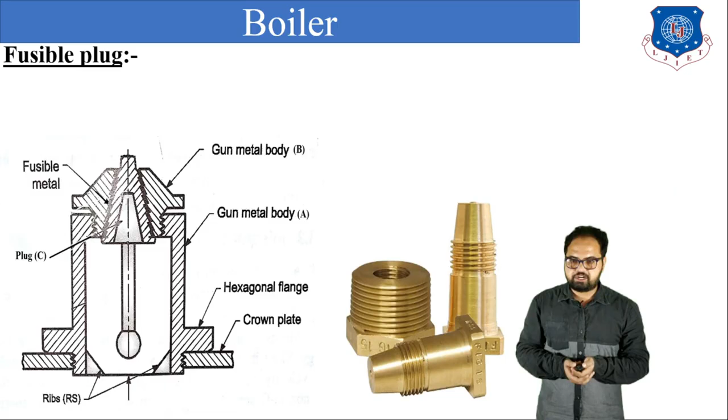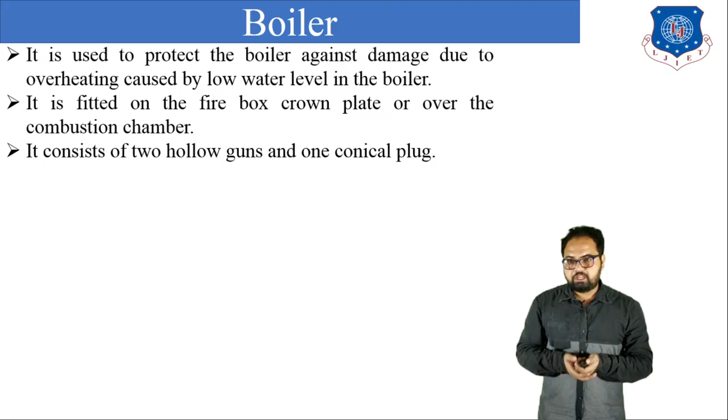So let's discuss the fusible plug in detail. The function of the fusible plug is to protect the boiler against damage due to overheating caused by low water level inside the boiler. It is fitted over the firebox crown plate or over the combustion chamber. It consists of two hollow gunmetals and one conical plug.

In normal working condition, the upper surface of the fusible plug is covered with water and the other end of the plug is exposed to the fire or hot gases. But when the water level inside the boiler falls below the danger level, the fusible plug is uncovered by the water and gets exposed to the steam.

This overheats the plug, and the fusible metal having a low melting point melts quickly, and thus the plug drops down. The hollow gunmetal B becomes open and the steam rushes into the furnace and puts out the fire. So this is all about the fusible plug.

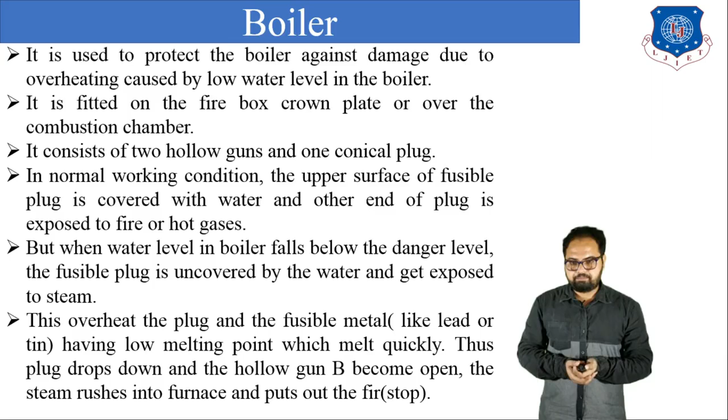Next is the blow off cock. From the name we can easily understand the function of the blow off cock. The blow off cock is mainly used for two purposes. First is to remove all the impurities inside the boiler drum, and the second is to empty the boiler whenever necessary maintenance work is required.

The blow off cock is generally fitted at the end of the mud box with the help of flanges and nut bolts. So whenever we require to empty the boiler or remove the impurities from the boiler, you can see in this image there is a plug valve or hole provided. Whenever that hole comes in the direction of the flow, the impurities will come out of the boiler, and whenever that hole is in the opposite direction of the flow, the flow will be stopped.

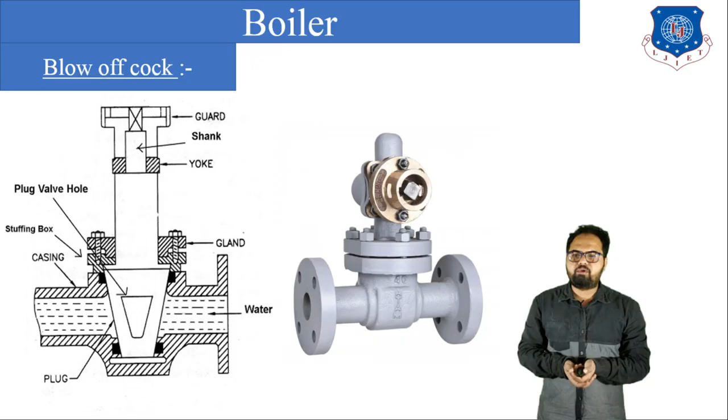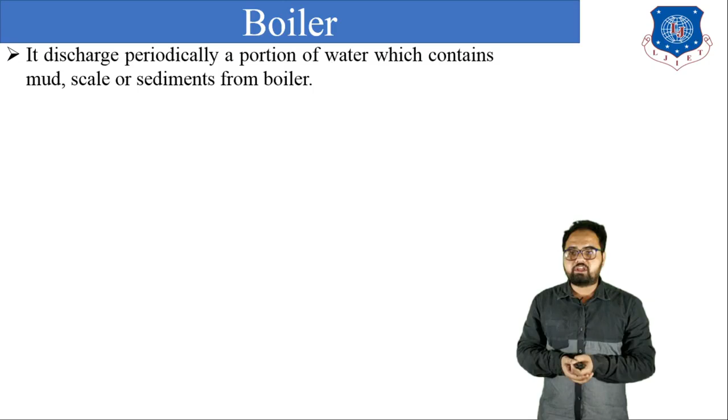So this is the basics of the blow off cock. The function of the blow off cock is similar to the tap which we use at home. So let's discuss the blow off cock. First of all, it periodically discharges a portion of the water which contains mud, scale or sediment from the boiler.

It is also used to empty the boiler, that we have already discussed. It is fitted on the boiler shell directly to the lowest part of the water space, because the impurities' density is higher than the water, so all impurities are collected at the bottom of the boiler. So this blow off cock is fitted at the boiler shell directly at the lowest part of the water space.

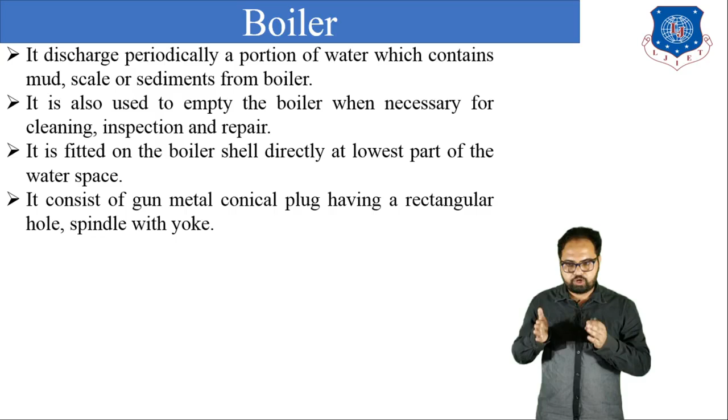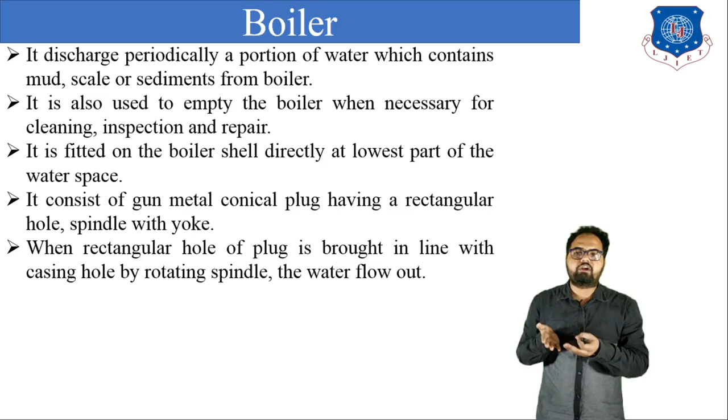It consists of a gunmetal conical plug, which has a rectangular hole, with spindle and yoke mechanism. When the rectangular hole of the plug is brought in line with the casing hole by rotating the spindle, the water will flow out. When the solid portion of the plug is in front of the casing hole, the water cannot come out of the boiler. So this is all about the blow off cock.

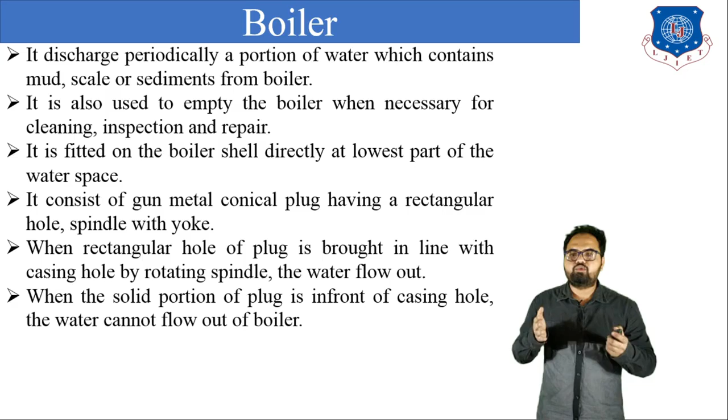One more thing, the top portion of the blow off cock is always square in shape, so that we can operate it with the help of a spanner, because in the boiler the blow off cock is always in contact with the hot water. By accepting the heat the conical plug becomes hot, so we cannot operate it manually by hand, so we use a spanner for operating the blow off cock.

Next is the feed check valve. The function of the feed check valve is to feed the water to the boiler. In normal working condition, the feed check valve will be closed. Whenever we want to transfer the liquid to the boiler, we operate the hand wheel provided at the top of the feed check valve. When we operate that hand wheel, we can see that inside there is a valve and valve seat, so the valve is lifted up from the valve seat with the help of the spindle, and at that time the flow of water takes place inside the boiler.

You can see the hand wheel, and a gland packing is provided, which is used to prevent the leakage of water. A spindle is provided, and a non-return valve is also there. Now the question is, why is a non-return valve provided there? So dear students, whenever the water is entering the boiler, the feed check valve is always subjected to two pressures. The first is the pressure of the pump, which is the inlet water pressure, and the second is the operating pressure of the boiler, because this side is always connected with the boiler and this side is always connected with the pump.

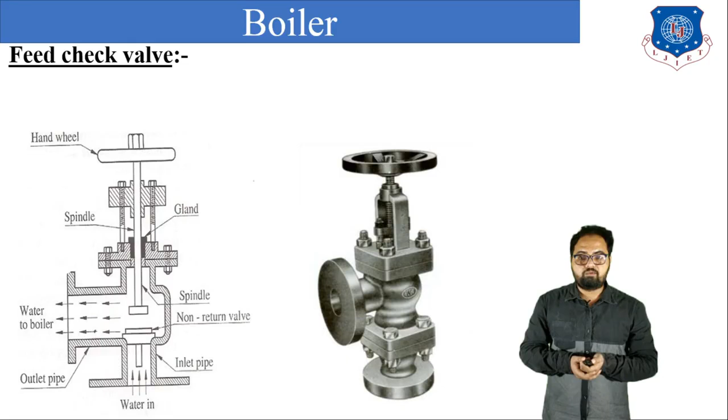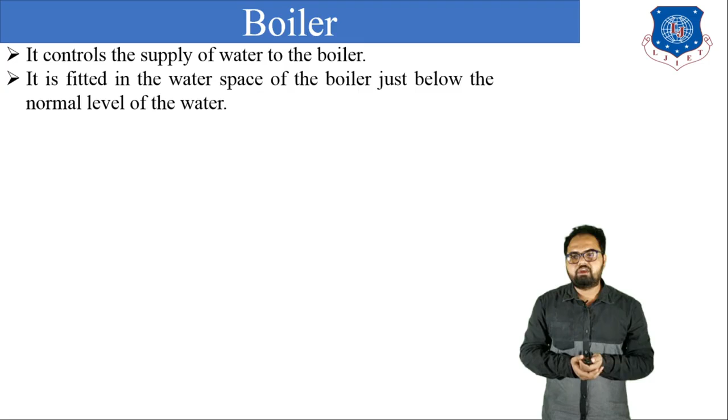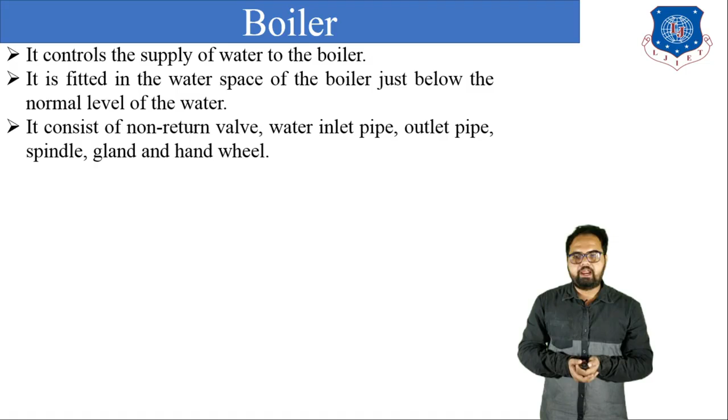So let's discuss the feed check valve in detail. First of all, it controls the supply of water to the boiler, that we have already discussed. Next, it is fitted in the water space of the boiler, just below the normal level of the water. It consists of a non-return valve, water inlet pipe, outlet pipe, spindle, gland and hand wheel. The inlet pipe and outlet pipe expose the valve to different pressures, that we have already discussed. The pressure difference lifts the non-return valve and allows the water to enter the boiler.

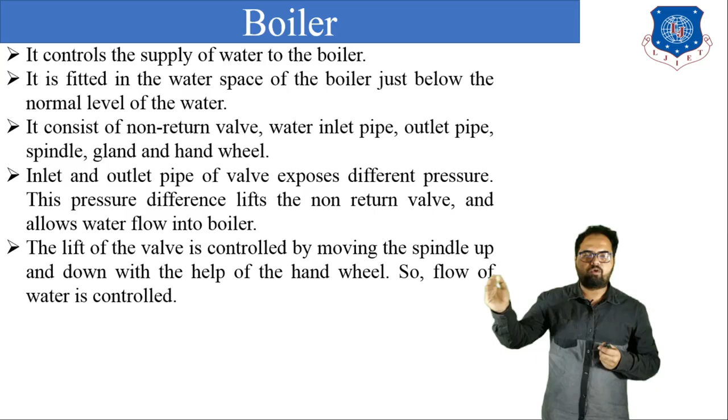The lift of the valve is controlled by the movement of the spindle up and down, so if the spindle is up the water flows in, and if the spindle is down the flow of water is closed. So this is all about the feed check valve.

Next is safety valves. According to IBR, the Indian Boiler Regulation, a minimum of two safety valves are installed on a boiler.

In normal working condition, when the pressure inside the drum is below the safe working pressure, the valve which is already fitted rests on the valve seat, or we can say the pivot rests over the valve seat.

But if the pressure inside the steam increases beyond the safe working limit, against the spring force, the pivot lifts up from the valve seat, and the excess steam is released to the atmosphere, maintaining safe working pressure inside the boiler. The spring force is set according to the safe working pressure of the boiler.

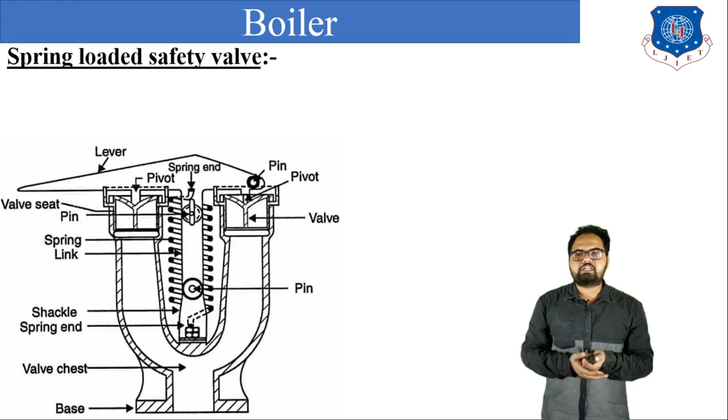So let's discuss the spring loaded safety valve in detail. First of all, it consists of a cast iron body having two branch pipes. A lever is placed over that body by means of pivots.

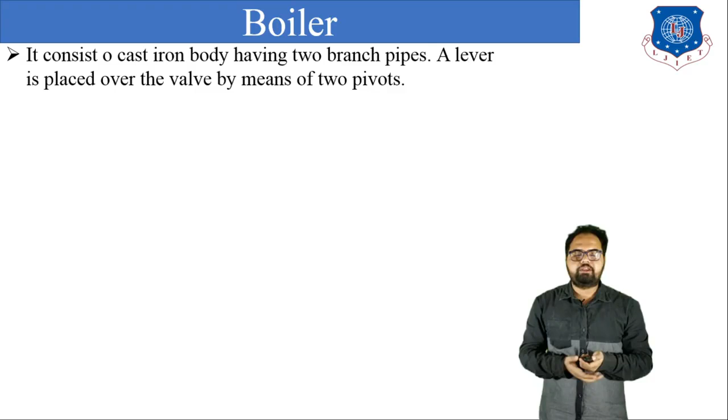In normal working condition, the downward force due to the spring is higher than the upward force applied by the steam, and the valve is closed with the help of the spring force.

When the steam pressure exceeds the normal limit, the upward force due to the steam pressure becomes higher than the downward force of the spring, and thus the valve is lifted from its seat, opening a passage for the steam to release out of the boiler. So this is all about the spring loaded safety valve.

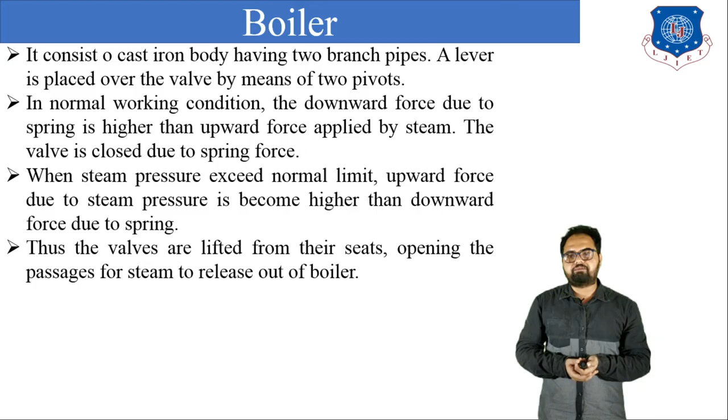Next is the steam stop valve. From the name we can easily understand the function of the steam stop valve. It is used to stop the flow of steam.

Whenever we want to transfer steam from one pipe to another, or from the boiler to the turbine, the hand wheel is rotated. Due to the rotation of the hand wheel, the valve lifts up from the valve seat and steam transfers from one pipe to another. This is the basic operation of the steam stop valve.

The function of the steam stop valve is similar to the feed check valve, except in the feed check valve we transfer water, while in the steam stop valve we transfer steam. The second difference is that the steam stop valve has no non-return valve installed, while the feed check valve has a non-return valve fitted.

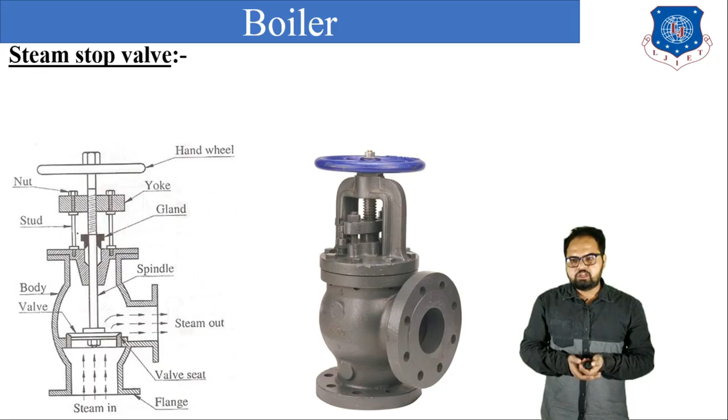So let's discuss the steam stop valve in detail. First of all, it regulates the flow of steam from the boiler to the steam pipe. It is fitted to the boiler at the highest part of the steam space.

The spindle is rotated with the help of the hand wheel, and due to rotation of the spindle, the valve moves up and down. When the valve sits over the valve seat, the passage of steam is completely closed, and the steam passage may be partially or fully open.

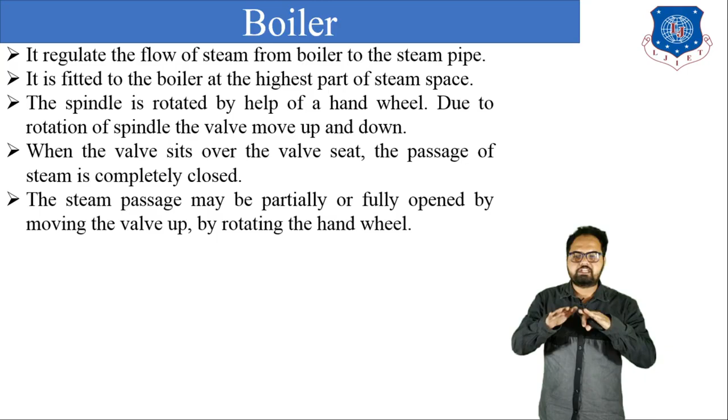When the valve sits over the valve seat, the passage of steam is completely closed. The steam passage may be partially or fully open by moving the valve up or down through rotation.

So this is all about the boiler mountings.